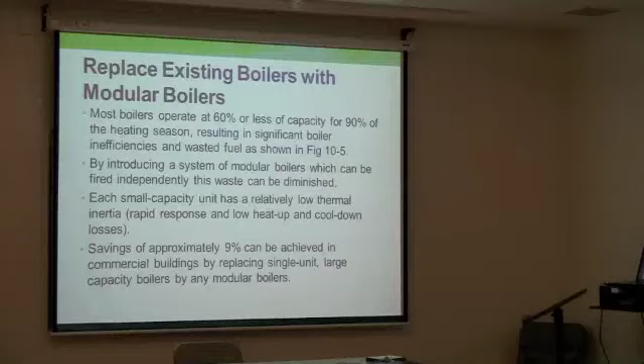Burner, basically, it saves energy there too.

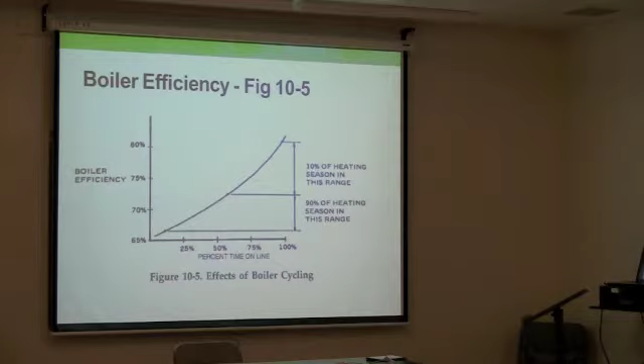Boilers' efficiency is changing. As they operate constantly, they have a better efficiency. So boilers are designed basically to operate constantly 24 hours. It's not a wise idea to shut down your boiler if you don't need it, because the amount of time that you need to warm up your system and bring it back, for example, 8 hours later, it's not worth it. It's better to keep it running all the time. And if the boiler is designed well, if you are not using any water or steam out of it, it usually reduces its energy use to a minimum anyway, because you're just accounting for the losses to the wall of the boiler to the environment. So it's important to keep the industrial boiler operating all the time.

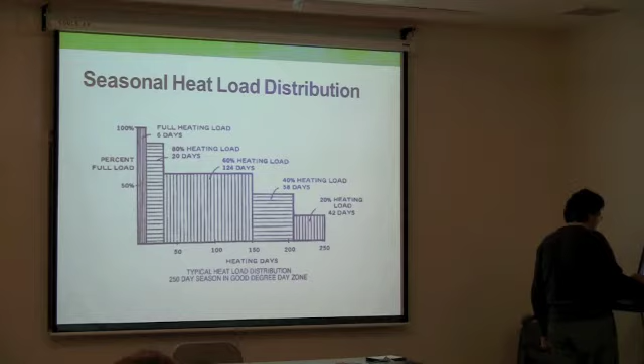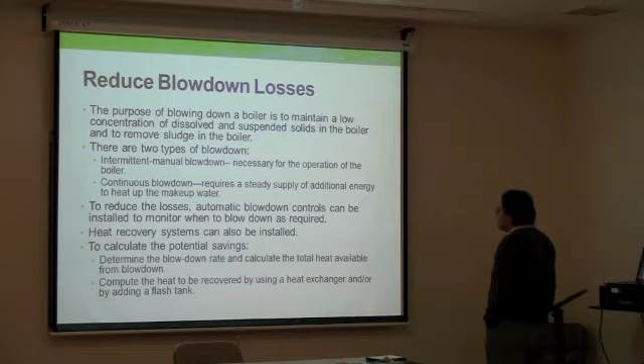One of the things you see in boilers is there is always a leakage. No matter how perfect your system is, there is always water leaking somewhere. And this water in the middle, before it gets hot, the steam is leaking and it's burning, and it's vaporizing and going out of this tank. So naturally, this water must be compensated with extra blowdown water. So it's very important when you're auditing your boiler that you take any kind of measurement in order to reduce the amount of water that is being lost.

There are a lot of times that there are leaky valves. Just change the leaky valves. Steam traps, they are leaking. Just make sure the steam traps are correct and not leaking.

Most of the time, what happens is the water that you're boiling in a boiler is not regular tap water. This is specifically conditioned water with a specific chemical balance in it. And this water, when it is steamed, it's used somewhere, becomes water again, and is used back in your system. This water is very expensive. You don't want to use it that often. As any gallon of that you're using, you have to replace it. It has to come from a chemical lab and has to be processed. So you want to make sure that you don't lose that water easily, basically.

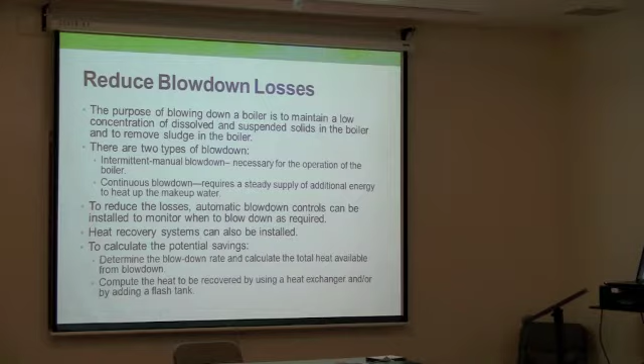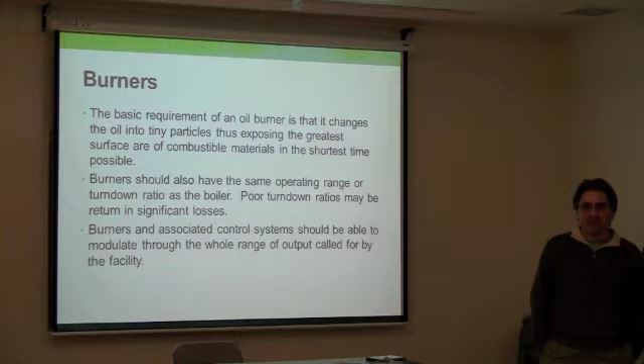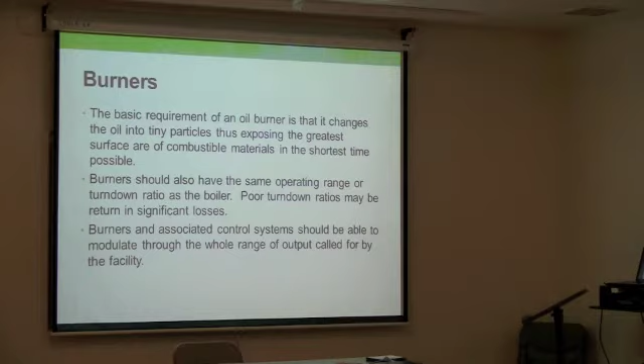Burners are very important. There are many types of different burners. As you can see, the technology is changing. The computer industry is helping the burner atomize the oil much better than before. And the operation of a burner is the most important factor in calculating the efficiency of the boiler, basically. That's why a lot of times it's worth it, for example, if you have an old boiler, switch the burner, buy a new burner for it, because new burners with advanced technology basically use less energy, less fuel, to provide the same amount of heat. And it's all about combustion, basically.

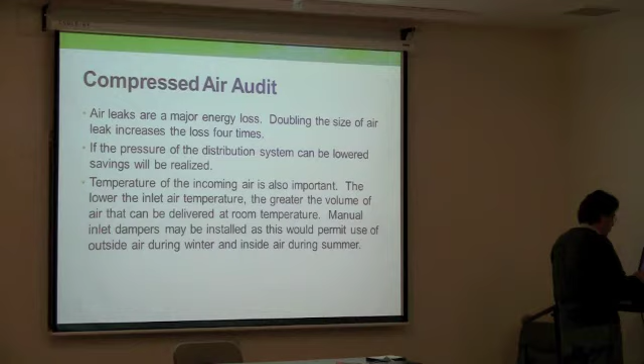When you are dealing with compressed air in factories, just make sure there is no leakage in the compressed air line, your compressor is working correctly, and you don't overcompensate for the pressure. If a factory needs a pressure of 3,000 psi, this is often what I see: the technician, for some reason, says, 'I want to be safe, I'm going to set up the sensor at 3,500 psi, just to be sure.' That 500 psi costs a lot of money for the company, because it's already compressed air and you're making it more compressed by 500. The relationship is not linear, it's power of n, and n is 1.4 for air. So it's costing a lot of money. If you need 3,000 psi pressure, just make sure you have 3,000 psi, and that's enough.

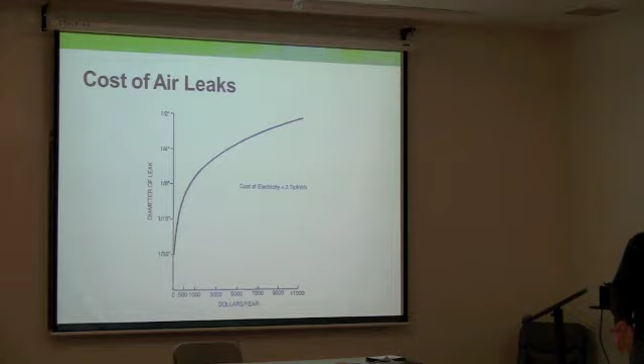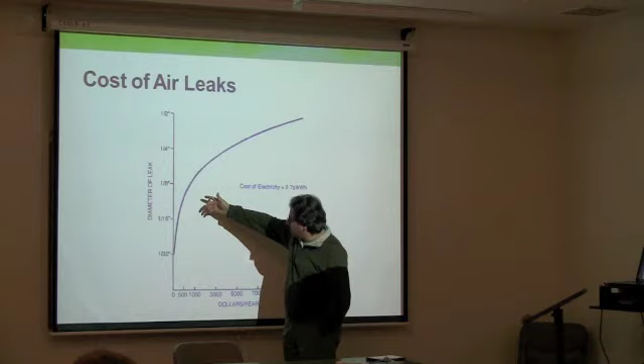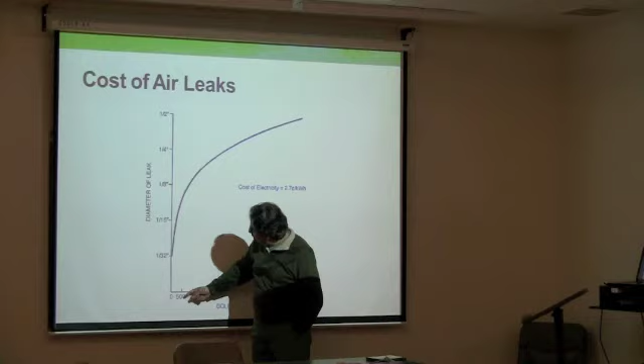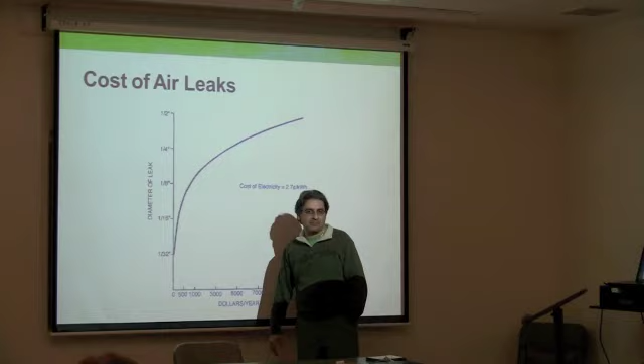These pipes sit for many years, so insulation is very important. Make sure insulation is all over. So when you do energy auditing, walking through a factory, take pictures of locations where insulation is broken. I always do that, I put it in my report. I point out these places where insulation has to be changed.

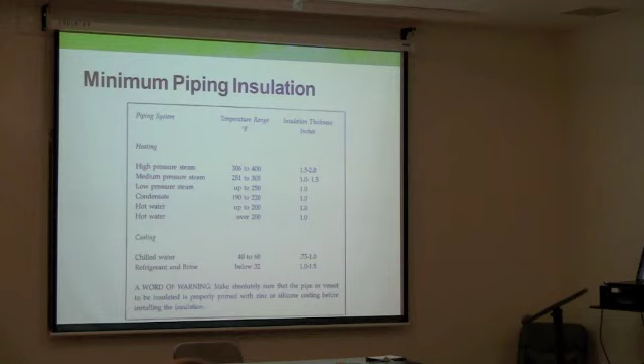Keep in mind, as an energy auditor, you're not the person who is doing all of this work. You're the person who is recommending the work. Most energy auditors are a one-man show, or two people. They just come up with a list of recommendations, economical analysis, and it's up to that company to go hire the certified people to do all of these changes, according to the report. So in your report, you've got to point out exactly everything with pictures, location, and everything.